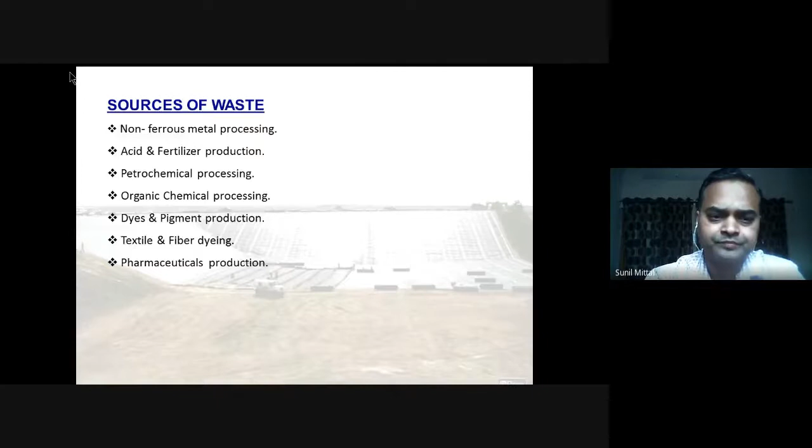So next, talking about the international rules regarding hazardous waste applicable in India. The major international law applicable for hazardous waste in India is the Basel Convention on Control of Transboundary Movement of Hazardous Waste and their disposal, and India ratified this treaty on 5th May 1992.

Then there is the Rotterdam Convention on prior informed consent procedure for certain hazardous chemicals and pesticides in international trade, and India is also a signatory to this. Then there was the Stockholm Convention on persistent organic pollutants, which India signed in 2001 and became effective since 2004.

Then there was the Minamata Convention, specifically on movement of mercury. Mercury is one of the most hazardous chemicals, and this convention was signed in October 2013 and is effective since 2017.

With industrialization, a lot of hazardous waste started being produced by our industries, and it ultimately reaches our homes. So in 2003, the Supreme Court ordered that all states generating hazardous waste need to make a TSDF facility in their states.

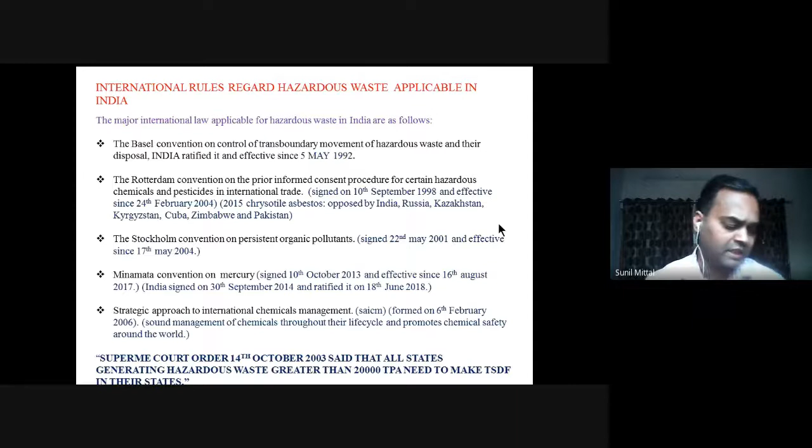States having more than 20000 TPA production of hazardous waste are required to make a TSDF, meaning treatment, stabilization or storage and disposal facility, for the hazardous waste.

Now in the next few slides we will be discussing the hazardous waste management and handling rules in India. Though these are very long, I will mainly be informing you of the key points.

Initially in July 1989... the government of India came up with the Hazardous Waste Management and Handling Rules, 1989. These were then replaced by the Hazardous Waste Management, Handling and Transboundary Movement Rules in 2008. And now these have again been revised in 2016 with almost the same name.

The difference between all these versions over the years is the number of categories now in the list of hazardous waste. I'm not going into the detail of each and every point, but for example, in 1989 there was only one schedule with 18 categories. In 2008, the schedule remained the same, but another schedule was added, schedule 2. And finally in 2016, schedule 1 has 44 processes and schedule 2 has 3 categories for waste concentration limits, and so on.

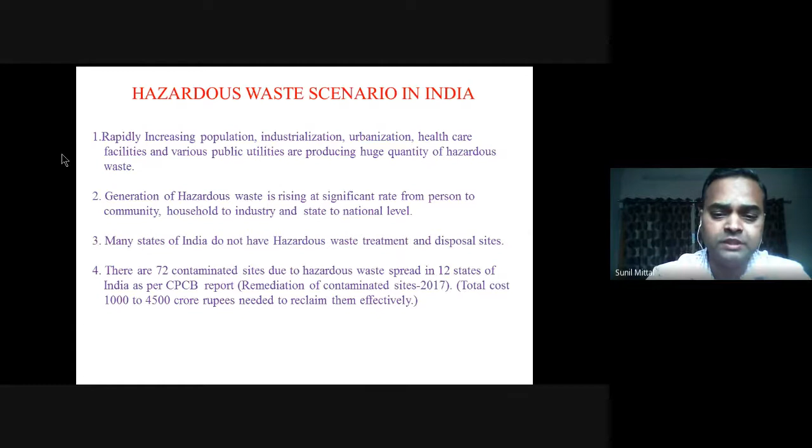So this is basically a result of the fact that we started very late. Our country started very late for the construction of TSDF sites, and it was only after the Supreme Court order in 2003 that the states or pollution control boards started working in this direction. But as of now, our situation is very good - almost all states have TSDF facilities. But whatever has been contaminated accounts to more than 1,000 crore rupees, which we ultimately have to reclaim with time.

So as I said, from here onwards I will be mainly talking about the hazardous waste management process - treatment, storage, and disposal. And this picture is from a real site of a hazardous waste management facility in India.

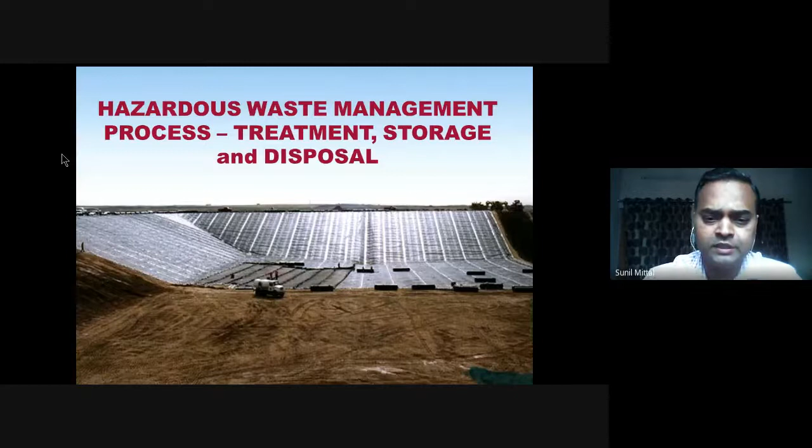And most of this waste was illegally dumped into low-lying areas, or was illegally dumped into nearby surface water bodies, or was illegally buried, contaminating the groundwater.

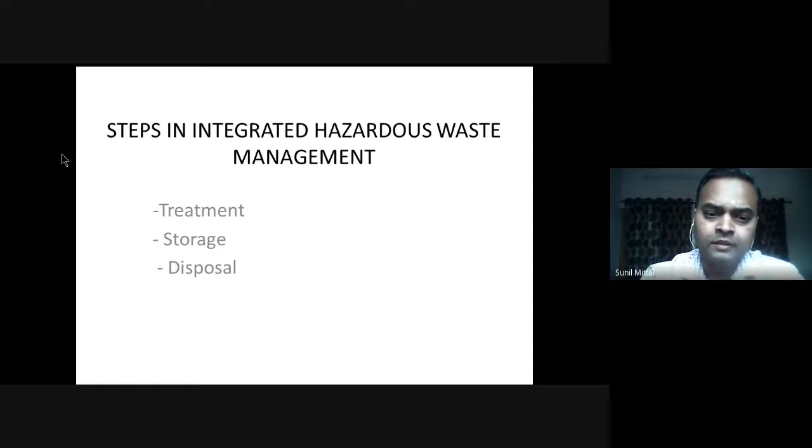So there are basically now a large number of TSDF sites that have come up in India. Almost each state has at least one, but many states like Gujarat, Maharashtra, and Andhra Pradesh have more than one TSDF site. And the basic three ways or pathways are used for their disposal.

These are, first, biodegradable organics, which accounts to less than 5%, then non-biodegradable organics, less than 20%, and others having calorific value less than 3,200 kilocalorie per kg and are not toxic. These are directly filled in the landfill site.

Whereas in case of biodegradable organics, non-biodegradable organics, and having calorific value less than 3,200 kilocalorie per kg and are toxic, like metals, these are landfilled after stabilization.

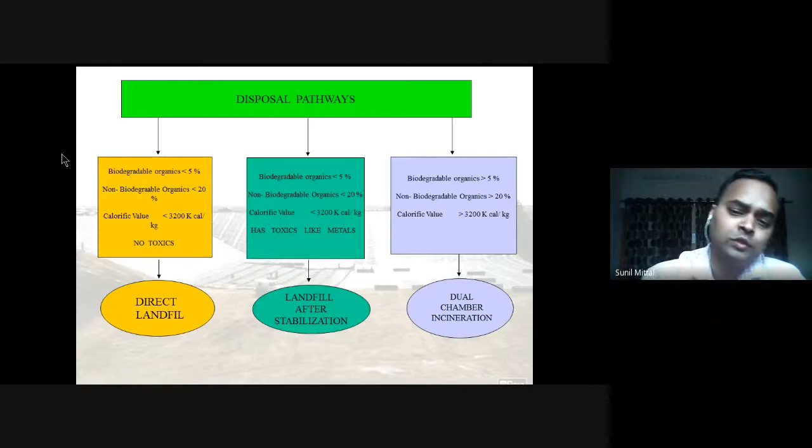And finally, the third one is the biodegradable organics with non-biodegradable organics and calorific value more than 3,200 kilocalorie. Then dual chamber incineration is first done, converted to ash, stabilized, and then these are filled in the landfill site.

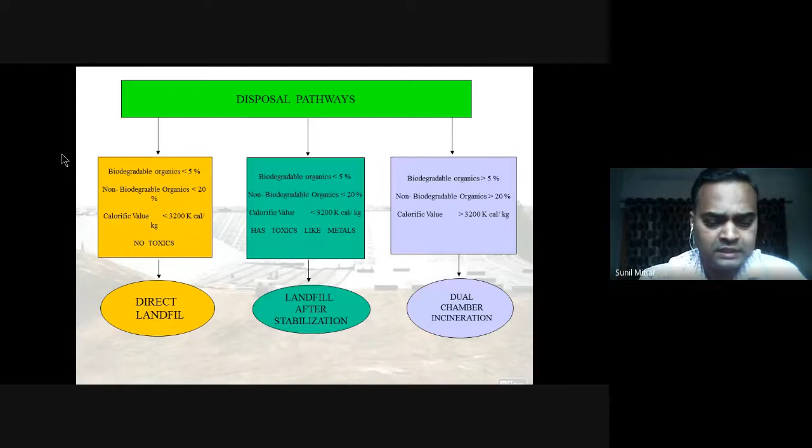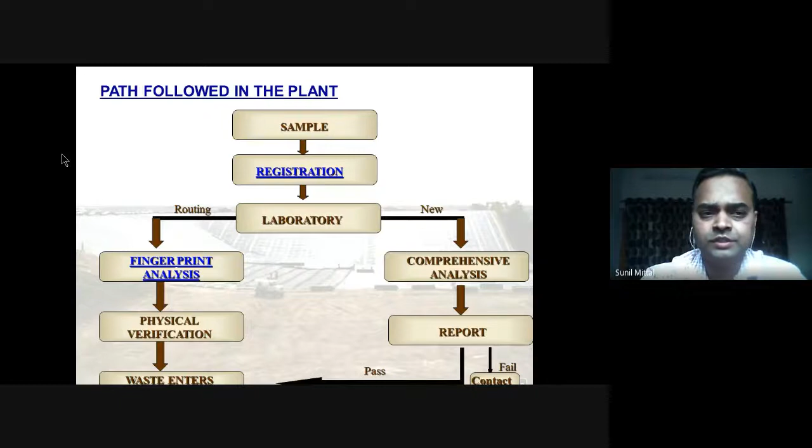So what is now coming on is what is the path followed in a TSDF site, how this waste is managed at a treatment, storage, and disposal facility.

When initially the government started setting up these TSDF sites, the first thing was identification of the type of waste, so that at the laboratory and at the waste management site it can be dumped or disposed of in a proper way.

There were different types of industries generating different types of pollutants or hazardous waste. So the whole waste management, disposal, or storage site was divided in such a way that a particular type of waste is stored or dumped in a particular type of area, so that two different types should not mix or react. This was the initial concept.

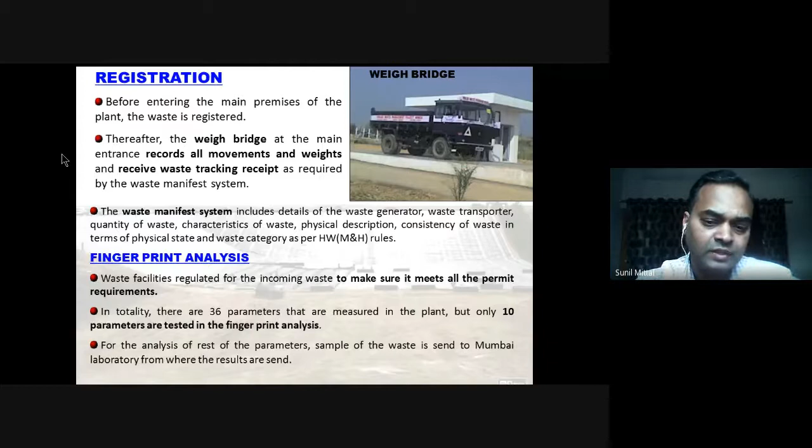Then spot test or detailed analysis. On receipt of waste at the facility, incoming hazardous or potentially hazardous waste are analyzed. The basic purpose of this analysis is classification of the waste for identification of its pathway of treatment or disposal, as I discussed in the earlier slide and will again be discussing in the next few slides. A report is prepared regarding the operation type to be followed, and thereafter the waste is accordingly treated.

Waste requiring treatment prior to landfill disposal or incineration shall be processed at the treatment plant. Wastes that are suitable for direct incineration shall be sent to the incineration plant for destruction.

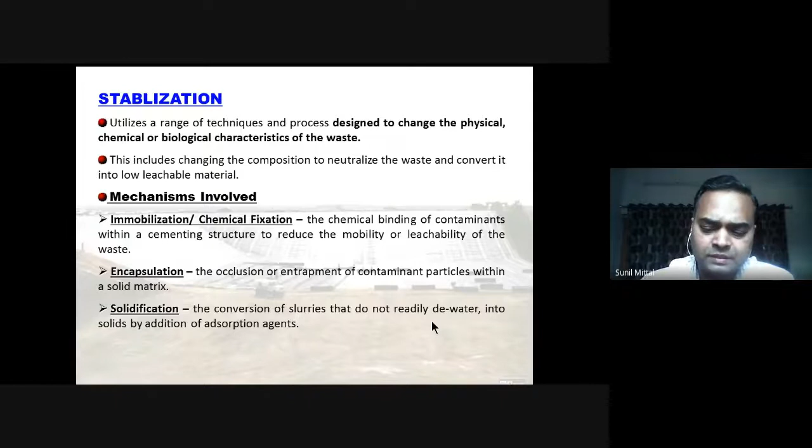So the immobilization or application criteria for this is for heavy metal and metal plating sludge, copper, chromium, arsenic, wood preservative wastes, mercury waste, bag house dust, spent catalysts are stabilized using chemical fixation.

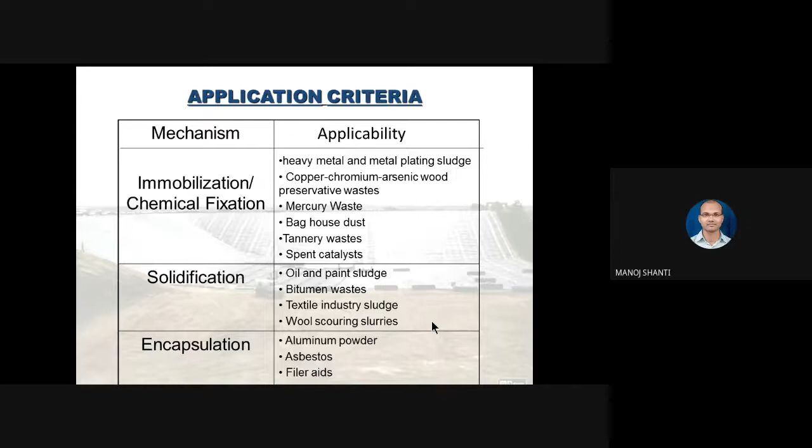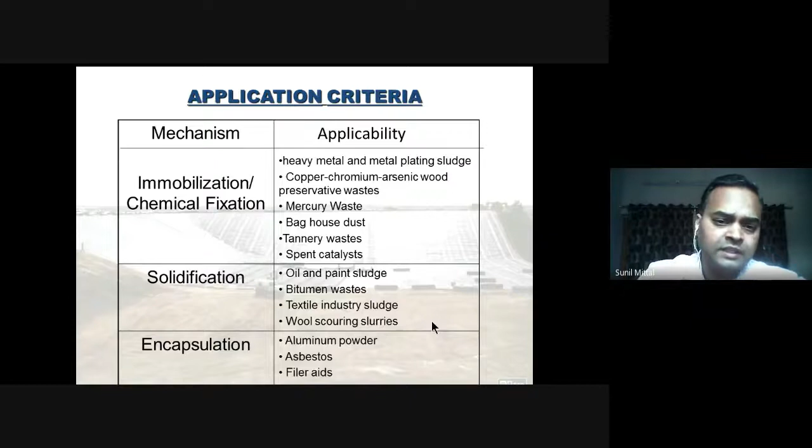In case of oil and paint sludge, bitumen waste, textile industry sludge, and wool scouring slurries, solidification is done. And in case of aluminium powder, asbestos, etc., encapsulation is the preferred process. So

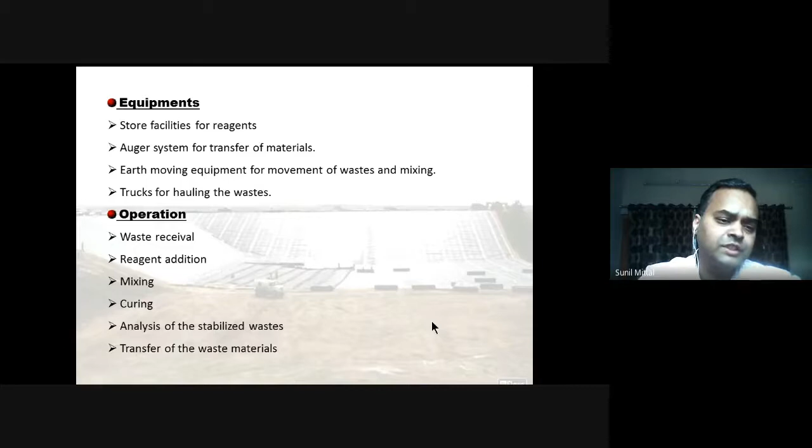the different types of equipment needed here are storage facilities for reagents, an auger system for transfer of materials, earth moving equipment for moving of wastes and mixing, and trucks for hauling the wastes. And for operation, waste receival, reagent addition, mixing, curing, analysis of stabilized waste, transfer of waste materials, etc.

are the processes used. And the advantages of using all these for hazardous waste are: safer to transport, safer to store, to remove, recover energy or natural resources from the waste, to render the waste non-hazardous or less hazardous, and safer to dispose of or reduce its volume.

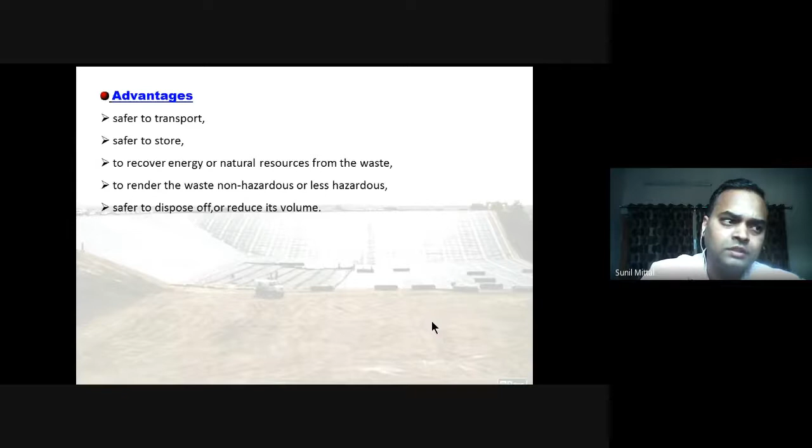So next, moving on to storage. This is the area of the plant where all incoming hazardous waste is stored until its pathway of disposal is determined. Internationally, there are certain wastes for which economically viable treatment techniques are not yet available, and these wastes are stored until alternate disposal technologies are made available. As per guidelines, the plants have facility at least for storing waste for 3 days.

And the storage area should have characteristics like proper ventilation, concrete or impermeable flooring, installation of fire control equipment, then drains provided around this area to avoid storm water entry.

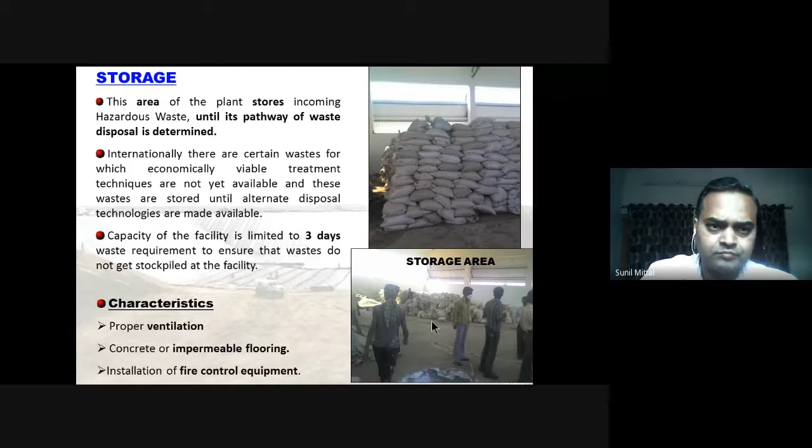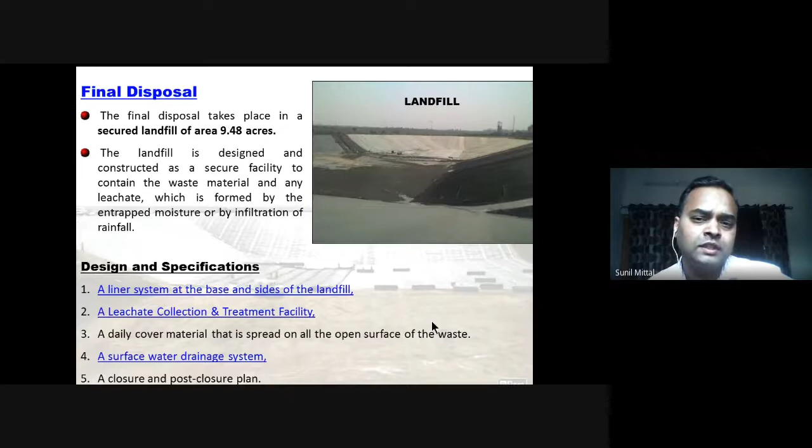Then final disposal. Actually, final disposal in all the cases is practically a landfill, either direct, after stabilization, or after incineration. So the landfill is designed and constructed as a secure facility to contain the waste material and any leachate which is formed by the entrapped moisture or by infiltration of rainfall. Here, and even in the first slide, I showed you a site under construction for the TSDF facility.

So here are design specifications. Some of the terms are coming. A liner system at the base and sides of the landfill. It is basically an HDPE material, high density polyethylene material, which nowadays we also call geoliners, or geomembranes is also a word used for these liner systems nowadays.

Then a leachate collection and treatment facility, a daily cover material that is spread on all open surfaces of the waste, a surface water drainage system, and a closure and post-closure plan. Basically, the closure and post-closure plan is final when the whole of the landfill site is filled with the hazardous material. Then after that, we have to have a closure and post-closure plan for this.

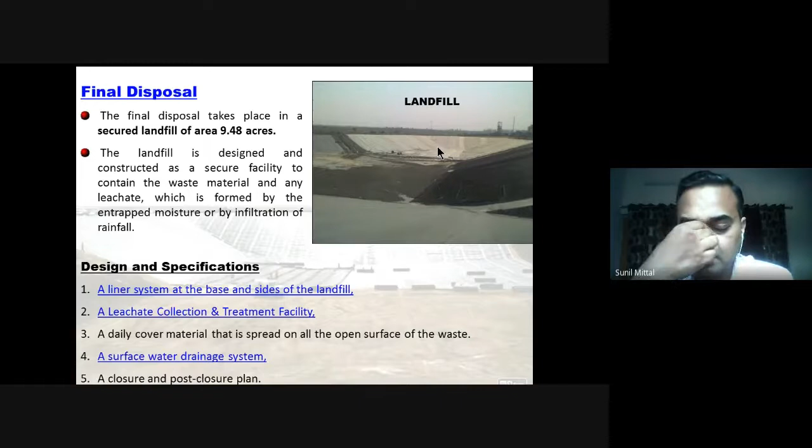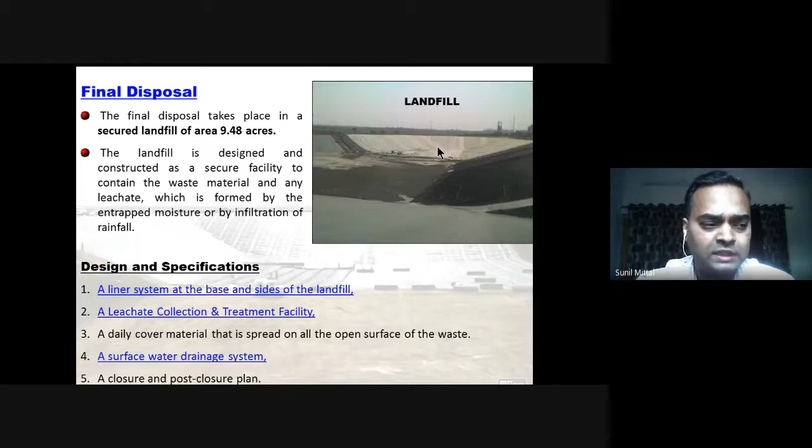For example, one site in Hyderabad was completely filled, and after that it has been converted into a very beautiful golf course, with around 30 feet of soil deposited on it, so that the effects should not come out. So this is basically, I can say, a vertical diagram of a final TSDF facility, starting from its construction to the final plan.

Here we can see a substrata which is lined by clay of 600 mm and compacted to a very high density. Then there is an HDPE liner. It is a secondary liner basically, and it does not allow any leachate to pass below it. Above this is made a drainage layer, and along with that a secondary leachate collection system and leak detection system is laid over this.

And then comes a geosynthetic clay liner of 7 to 8 mm above this, followed by another HDPE or primary liner. And this again contains a drainage layer of almost 300 mm. This is a primary leachate collection system, and above all these is a geotextile membrane, which is again a very high density membrane. And after this,

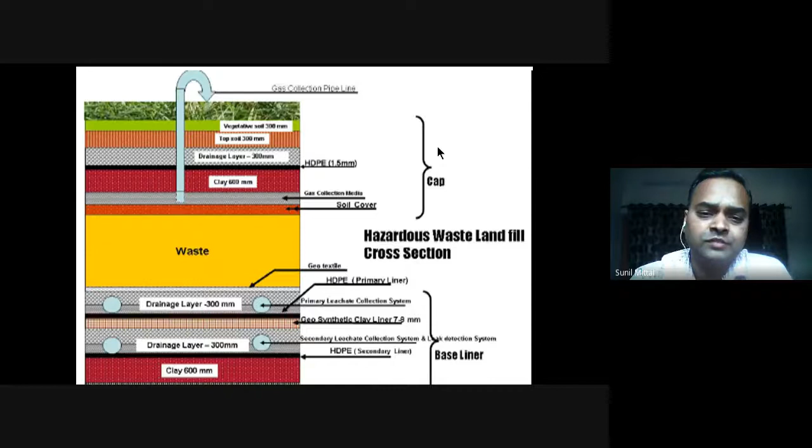the whole of the plant is divided into different segments for receiving different types of wastes. A particular type of hazardous waste is disposed of in a particular area, and after every few centimeters or a meter of disposal, depending on the type of hazardous waste, it is covered with a soil layer, followed by an HDPE layer, along with the drainage system, and again the site is ready for receiving the waste. So this process is continued every time for different types of wastes in different areas.

This is a reason sometimes problems come that one area remains very deep and another becomes shallow, because one type of waste is received in higher quantities and another in lower quantities. But okay, that's a different thing, the problems the plants are facing. So basically, that is telling you what the liner systems are.

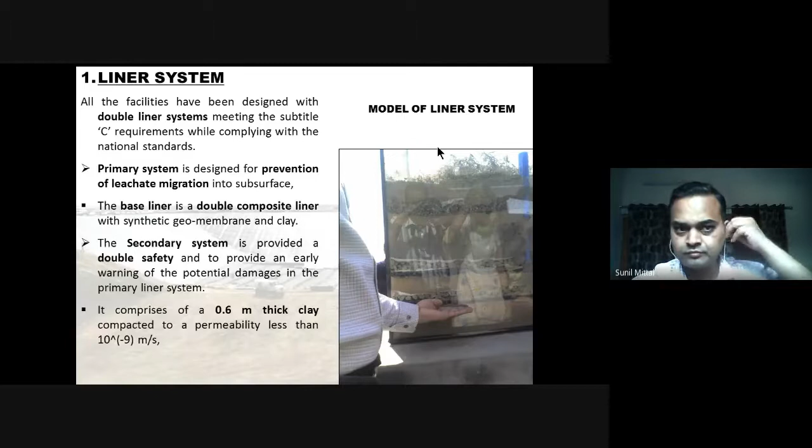All facilities are mainly designed with the double liner systems, meeting the Subtitle C requirements of the Government of India plans while complying with national standards. So the primary system is designed for prevention of leachate migration into the subsurface. The main aim is that the leachate should not migrate into the subsurface and contaminate the groundwater.

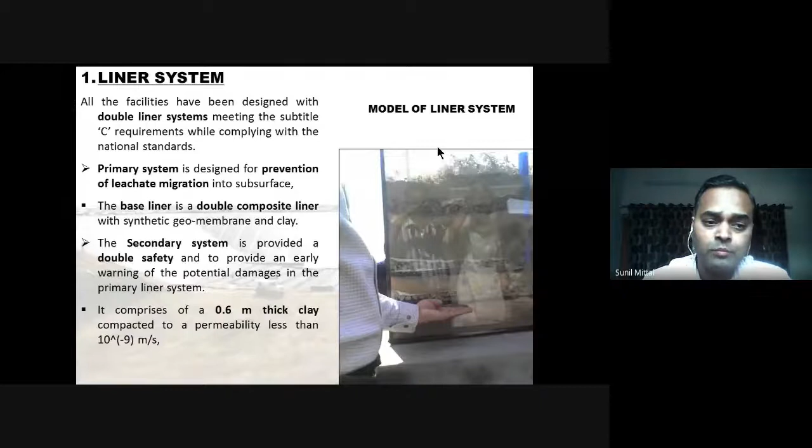So the base liner is a double composite liner with synthetic geomembrane and clay. The secondary system is provided as a double safety and to provide an early warning of potential damages in the primary liner system. It comprises 0.6 meter thick clay compacted to a permeability less than 10^-9 meter per second. From this, you can think what the permeability is, and if a small amount of water has to leach down, how much time it will take.

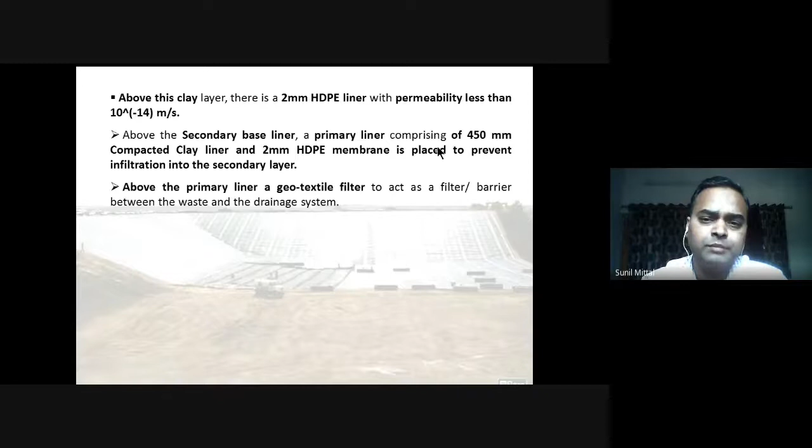And as I have shown, above this clay layer there is a 2 mm HDPE liner with permeability less than 10^-14 meter per second. Above the secondary base liner, a primary liner comprising 450 mm compacted clay liner and 2 mm HDPE membrane is placed to prevent infiltration into the secondary layer. Above the primary liner is a geotextile.

So I will not be going into detail on the different liners. Basically, these are clay liners consisting of hydrated aluminum silicates which, properly compacted, form a soil mass with a very low hydraulic conductivity. Other things I have already discussed. Civil parameters may be interesting for the civil people who are here.

Size of particles is less than 50 mm. Clay fraction 15%. Particles are of 75 micron. Plasticity index 10 to 30. Permeability less than 10^-9, and grading and finishing with 2% slope.

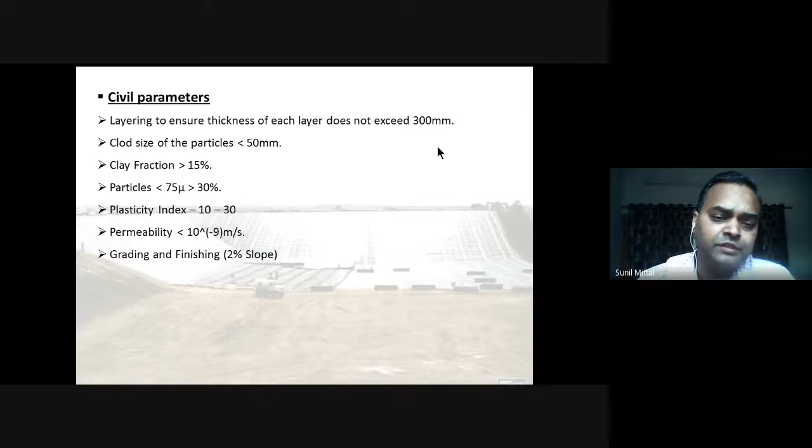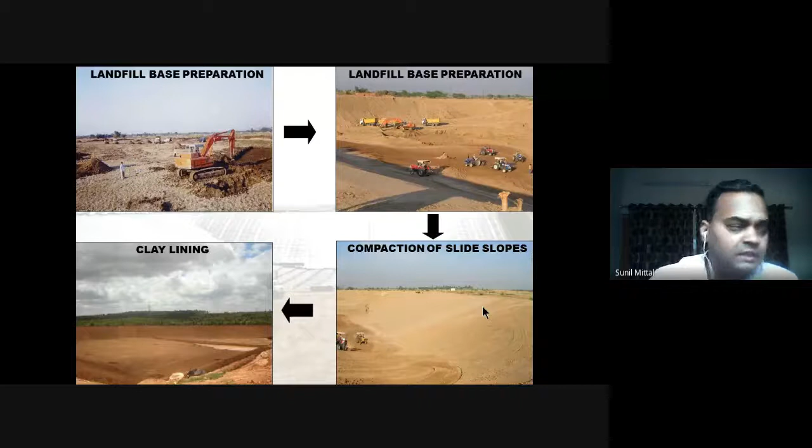So these are some of the photographs of a TSDF facility where you can see in the first one the landfill base under preparation. Then after a few days the base preparation is in advanced stages. The third one is compaction of side slopes, and clay lining in the fourth one.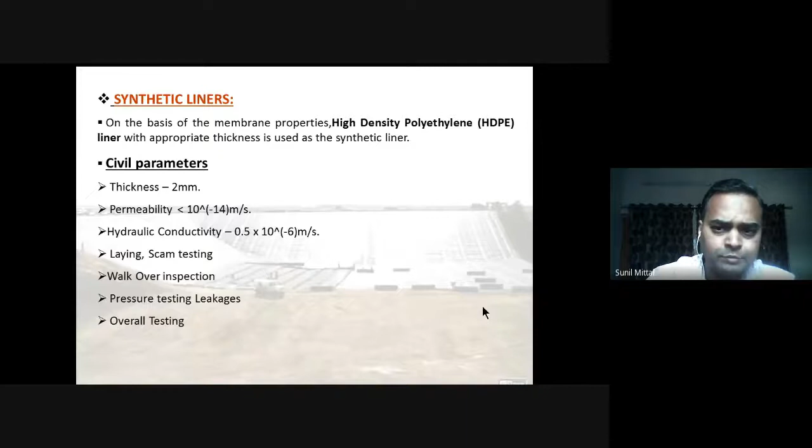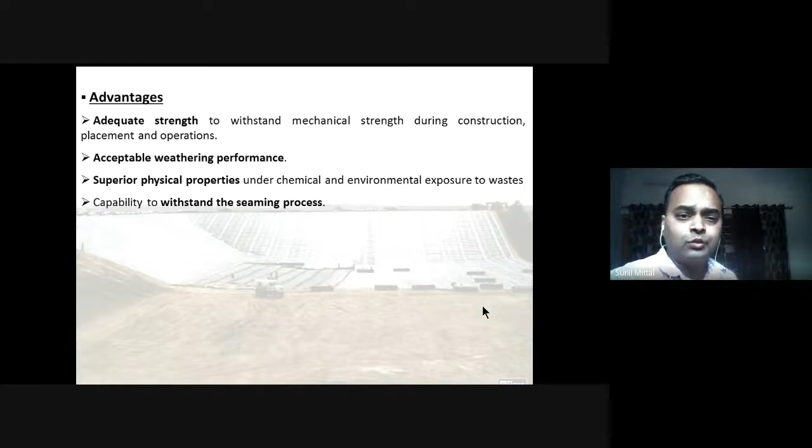So synthetic liners, I have already informed you, high density polyethylene with the different parameters. So why are we using these geoliners or these materials? The basic purpose is their adequate strength to withstand mechanical stress during construction, placement, and operations, acceptable weathering performance, superior physical properties, and capability to withstand the seaming process.

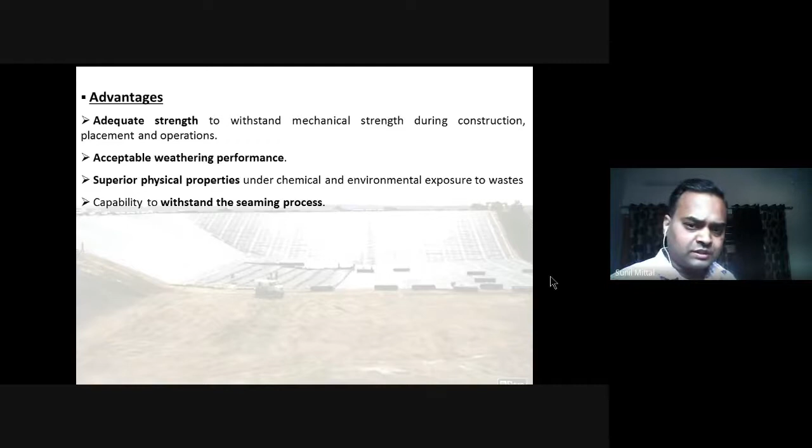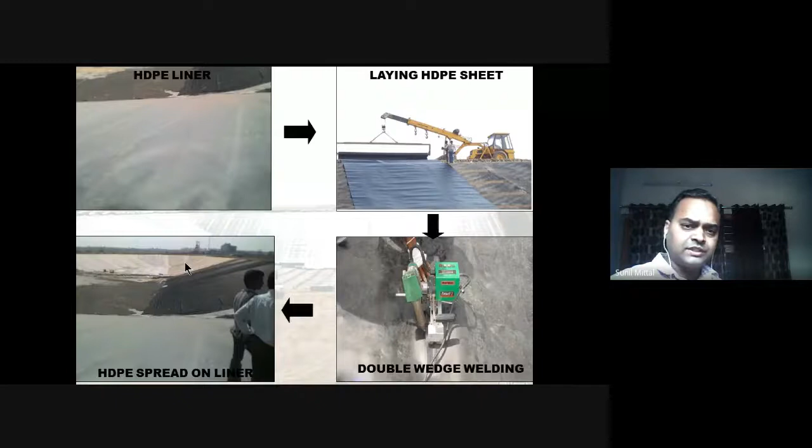Then another important point is the leachate collection and treatment facility. Whatever waste we have ultimately contains some moisture or may attract moisture during disposal. When we compact this, leachate goes down and has to be collected and removed using the leachate collection and treatment facility. For this, semi-perforated HDPE pipes are laid directly over the primary and secondary liners and graded towards the collection sump at no less than a 2% slope.

A drainage layer 300 mm thick of graded sand and gravel is placed over the entire base of the landfill covering the pipe network, so that all the leachate gets collected in these pipes and moved to the collection sump. A geotextile over the primary liner serves as a filter or barrier between the waste and the drainage media. The pipes have sufficient strength to withstand the load imposed by the overlying waste and associated earth moving activities. The secondary layer also acts as an equivalent leachate collection system.

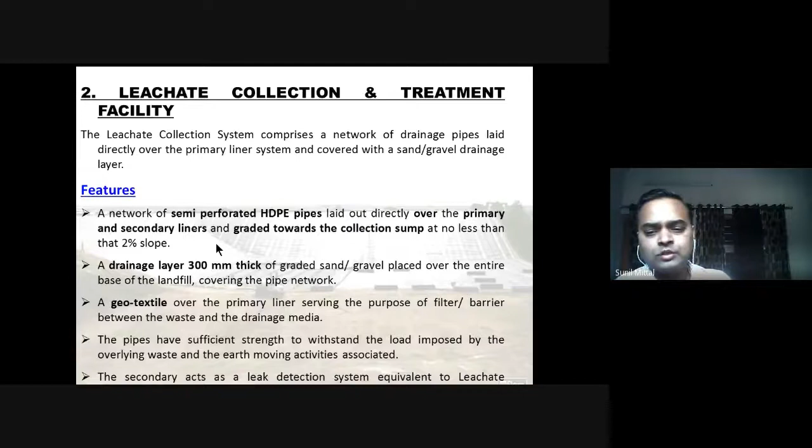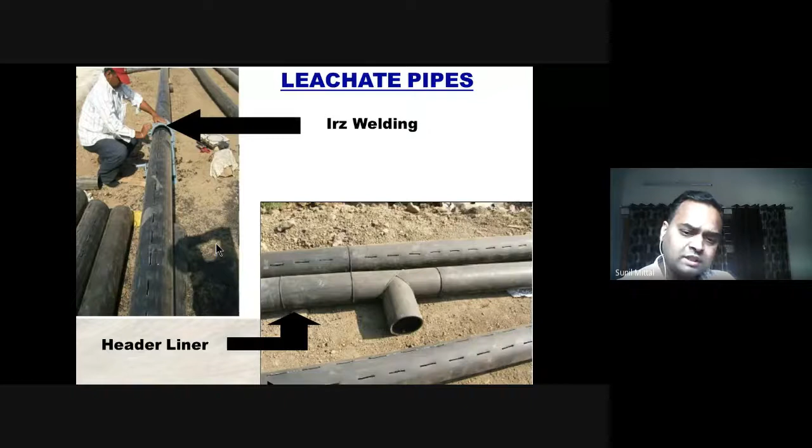So these are the pipes used for collection of the leachate and transferring it to the sump. Then comes the surface water drainage system. The design includes a garland drainage system all around the landfill, which is lined and connected to a storm water collection sump.

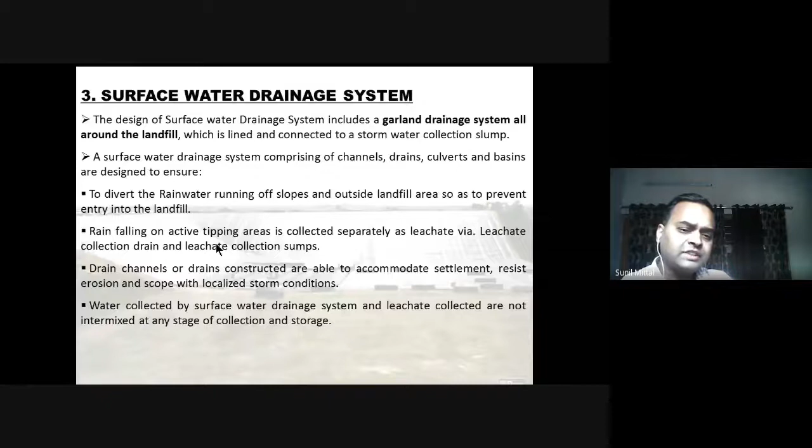The surface water drainage system, comprising channels, drains, and basins, is designed to divert rainwater running off slopes and outside the landfill area so as to prevent entry into the landfill. Rain falling on the active tipping areas is collected separately as leachate via leachate collection drains and sumps. Drain channels are constructed to accommodate settlement, resist erosion, and cope with localized storm conditions. So leachate collected is not intermixed at any stage of collection and storage.

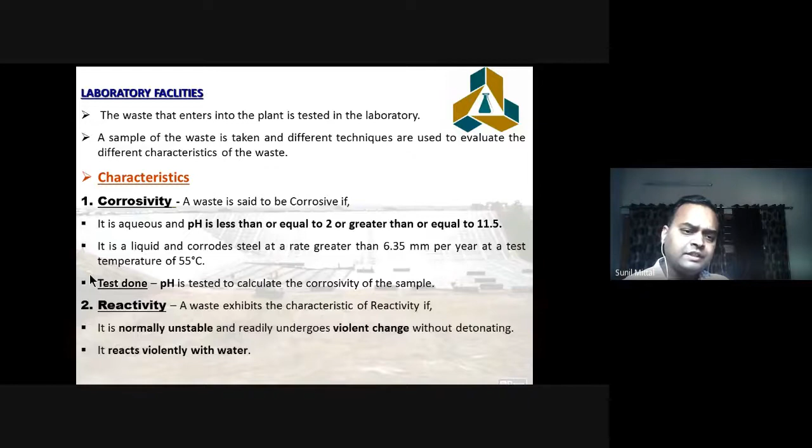So moving on to another part of my presentation, which is basically the hazardous waste scenario in India. As I talked about earlier, there are a large number of contaminated sites in India, and if we talk about these in different states, then West Bengal is at number 1, Odisha is at number 2, then Uttar Pradesh and others. So there are a large number of contaminated sites in India, mainly in West Bengal, Odisha. Then Gujarat is also one such state.

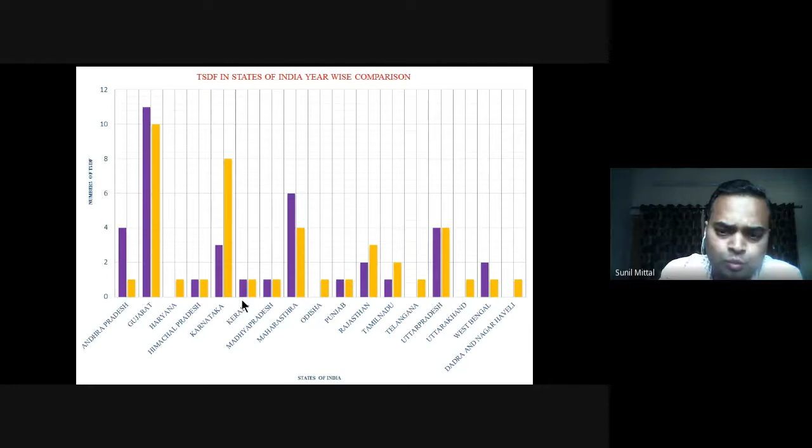So this is a year-wise comparison of TSDF sites in 2007-8 to 2016-17. Most of the states have their first landfill site not filled, but there are some states where their TSDF sites are already filled with waste and have been converted to post plan as per guidelines. Like Gujarat, we can see the number has reduced. Likewise, in Karnataka, a new facility has come up. In case of Maharashtra, 2 sites may have filled. That is why the number is less, and all other states are having almost the same number. And at a few places there is no blue color along with yellow because these were not having TSDF facilities in 2007-8.